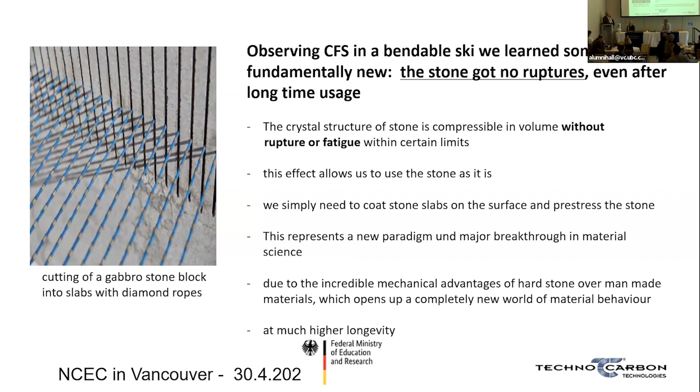So this really represents a new paradigm and major breakthrough in material science due to the incredible mechanical advantages of the stone over most other materials and at a much higher longevity. So how can we move this further? Okay, it works. So here you can see what we can do with the stone.

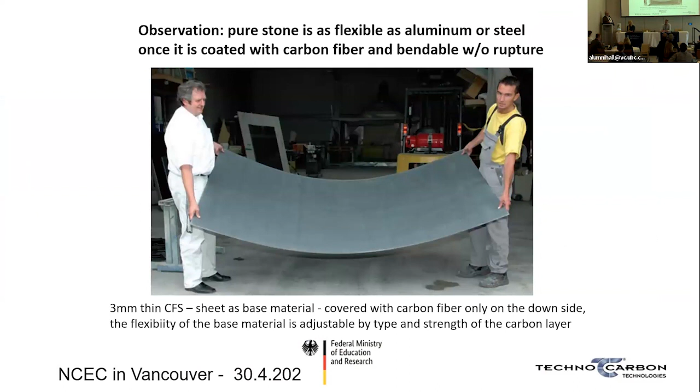This is a 3 millimeter thin CFS sheet as a base material, covered with carbon fiber only on the downside. You see the stone surface on the other side. And the flexibility of the material is adjustable by the strength of the carbon fiber, meaning the relation between the thickness of the carbon fiber and the stone layer.

Then I visited some of the climate change conferences and wanted to find out what we could do with this material eventually to tackle climate change issues. And we showed this material at the climate change conference in 2007.

We had a little booth there, and suddenly a student from Saudi Arabia was standing in front of me and said, 'What if we could do this carbon fiber from CO2? Your material, the stone, is made by nature. We just have to cut it with electrical energy. There's no emissions involved in this anymore.' I said, 'Yeah, this is a fantastic idea.' The guy jumped up about 1 meter, got up to speed, said 'I need to tell this to my professor.' He was gone. I never saw him again in my life, but I said to myself, now I know why I went to this climate change conference.

And we started working on the idea to make the carbon fibers from CO2. I met Professor Brück at the Technical University of Munich, and he said, 'We have a large algae center that we drive together with Airbus, and I can help you, we can do it.' And then the Green Carbon Project was initiated and funded with 7 million by the German government.

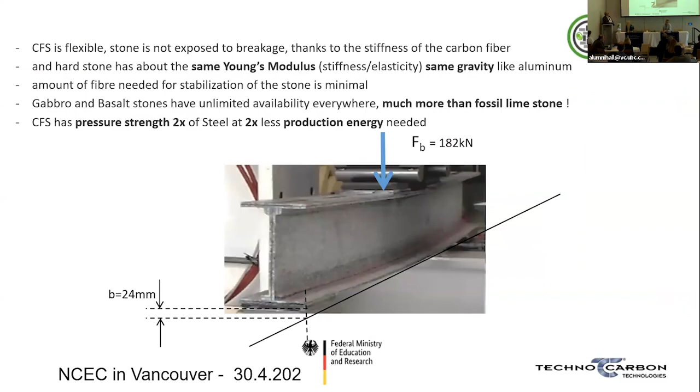And you can see here still the stone is keeping its promise. It is flexible even in a structure like this. It is 2 times lighter than a comparable beam from steel.

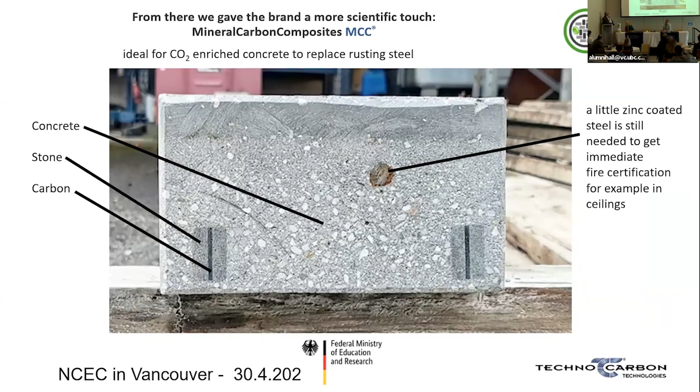We also use this, I have some samples here, to use it as rebar in concrete. For example, it's ideally suitable for CO2 enriched concrete to replace the rusting steel. And you can see that we can even flexibilize concrete with this for earthquake-safe buildings, for example, and so on.

This, by the way, is not an American garage. It's located in Germany, but we thought it would be a good idea to show this in the US because you like the garage of initial works.

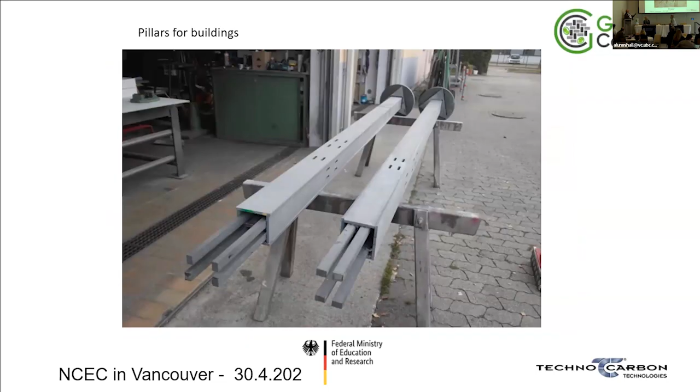We built beams like this. Again, I did something for my wife. This was the funded project, and then this was funded by the German government. We built some rectangular beam and built a very nice and neat terrace in front of our steep slope, in front of our house, where we had big problems to build something from concrete.

And you see here very thin, 10 millimeter thin stone slabs from the limestone, which is the base material for cement making. We use a stone as it is. It is coated with carbon fibers. And what is...

Yes, sure. We talked about that yesterday.

We can actually realize any kind of geometry with this. University of Aachen came up with the idea to build a rotor blade instead of using glass fiber. This is a downscaled prototype that we built with them.

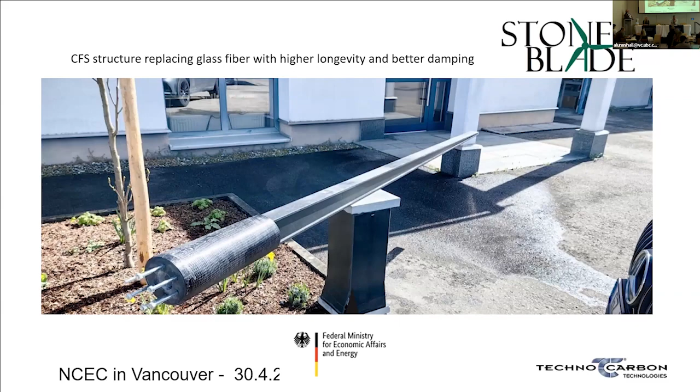This project was just finished 2 months ago, and it was tested. It has much higher longevity than other structures.

And together with the Federal Ministry of Economic Affairs and Climate Action, we initiated another project which is still ongoing to make railway sleepers, which is a large scale application.

This guy, so I have 10 million load reversals without any cracks. A concrete sleeper dies after 3 million. And we needed to stop the test without any rupture because the immense cost for the testing went already up the electrical power to some 20,000 euros. And it didn't make any sense to test this thing anymore because it wouldn't break.

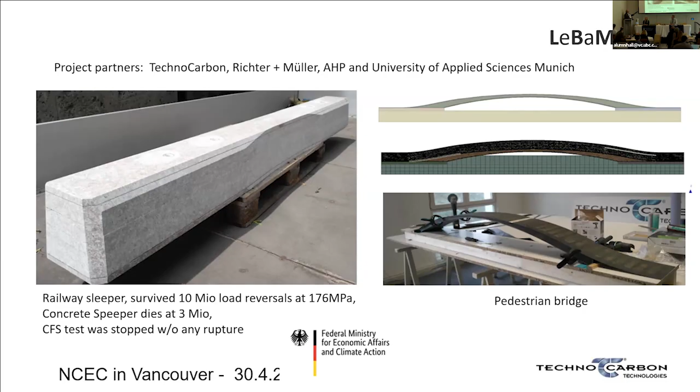The other thing we are developing here is a bridge, an 18-meter pedestrian bridge. And then we got another call from the German government to be included in the CDR Terra project, land-based CDR, carbon dioxide removal. And within that project, we developed an old dream to really build a house wall, which is highly carbon negative from our materials.

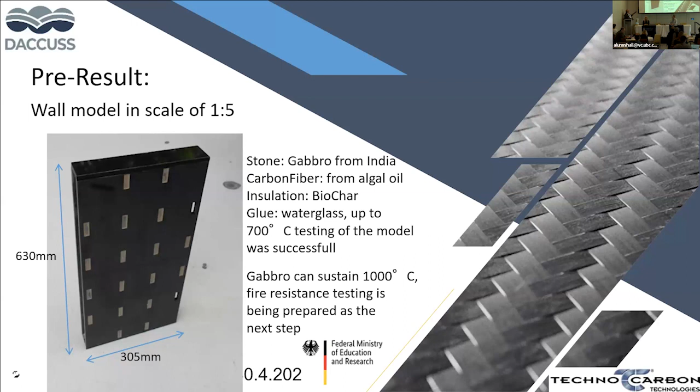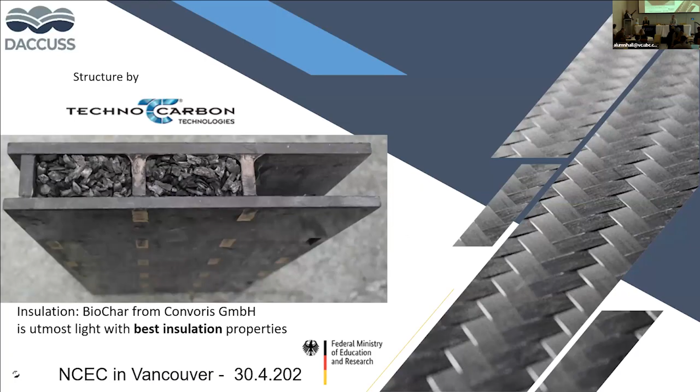We use biochar as insulation material inside. It's a very light type of biochar, together with the carbon negative carbon fibers and the gabbro stone powder that we create while cutting the slabs. We get a high carbon negativity of about minus 59 kilograms per meter house wall, while a house wall from concrete has 98.

Wait, one more presentation got to fit in here in this session. I'm finished now. Okay. Yeah, okay.

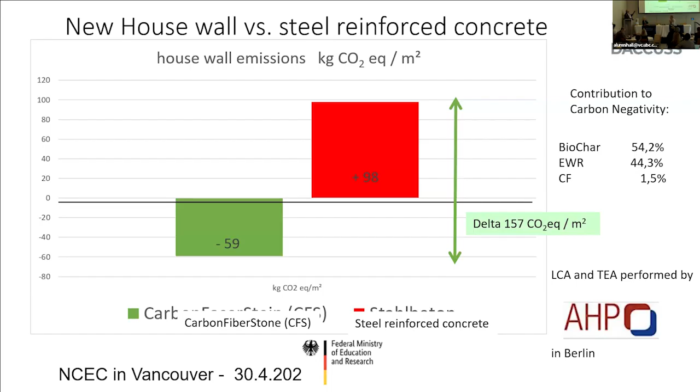But I needed to show the house wall because this is really highly carbon negative, and it comes at the same cost than a wall of concrete.

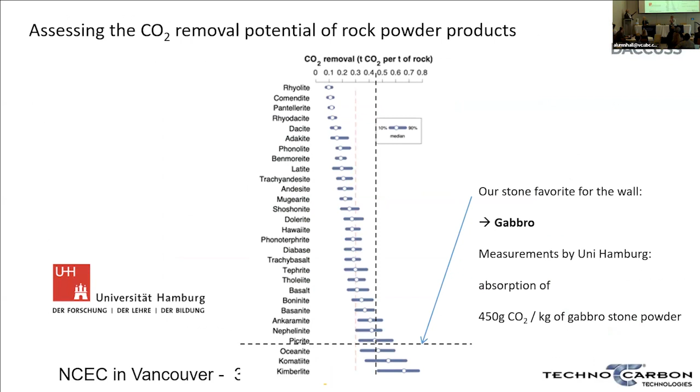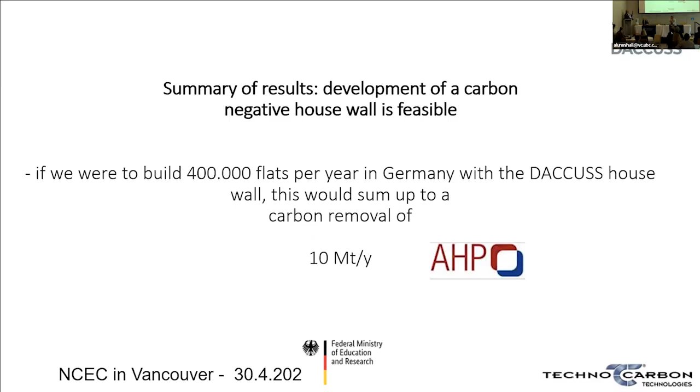The gabbro stone powder is the best in absorbing CO2, about 450 gram per kilogram of gabbro stone powder. And if you were to build 400,000 flats in Germany, this would sum up to 10 megaton of carbon dioxide removal per year in Germany.

And a global view on that, we could capture at least 4 gigatons of CO2 per year if we would replace all steel and cement and concrete.

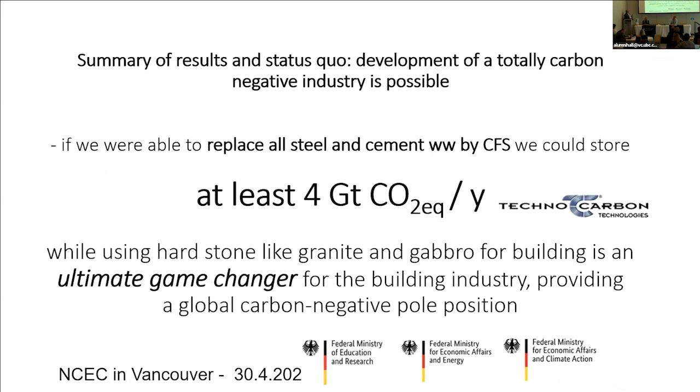We have patented all of this. We are worldwide active. And now we are looking for money from investors because we need to scale this up worldwide and develop applications in different countries. Thank you very much.